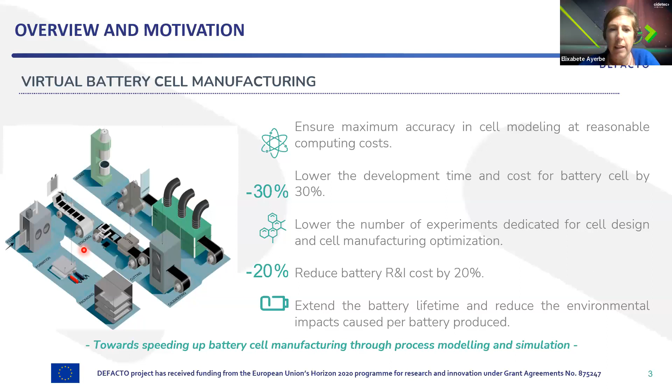So this is very much the core activities within the project, but we cannot forget about all the characterization and prototyping work, because without the real cell, we wouldn't be able to calibrate and validate the tools. So even though the main contribution is on the modeling, we cannot forget all these activities on the characterization and prototyping, as I was saying.

And then something in which we might be also working is to provide certain guidelines, or to see how we can transfer the knowledge and tools we have gained within the project to different chemistries like the LNMO and graphite silicon, as pointed out here.

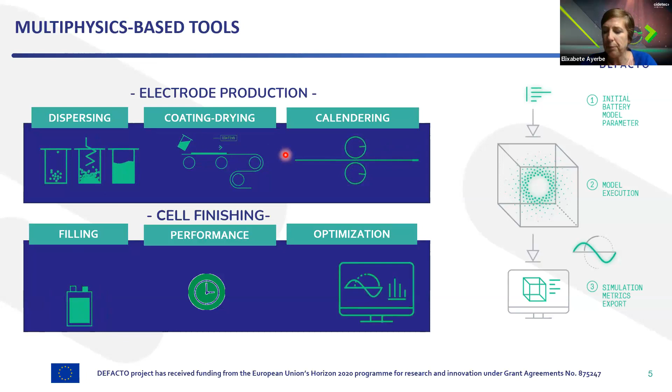So this is the main target, and this is a very complex procedure, but we are in good shape, and I would say on a good track to reaching the target. So coming to the physics-based tools, as I was saying, we are very much focused on electrode processing, but also on the filling step.

So our partners like TU Braunschweig have been leading these 3 step models in which they are working. They have already developed a tool so that they can mimic, or identify, the best agglomerate size depending on the shear stress in this dispersing or mixing step, the wet mixing procedure.

Then jumping to the drying step, they have developed a CFD-DEM simulation, and then they can predict certain properties of the electrode, like the thickness and porosity, depending on the drying parameters, which is a very complex step, so it might be impacting very much not only on the performance but also on the aging, depending on these specific parameters, as well as the active material distribution.

And then finally, they've been working on the calendering, developing DEM simulation tools in order to replicate the impact of certain calendering parameters like the compaction or pressure parameter onto the final density or mass loading of the electrode together with the final porosity.

So this is very much important, but not only this, because what we are doing currently is to connect this final electrode configuration to the filling procedure step in a way that they have already developed tools. They are different high fidelity tools so that they can identify the best filling process parameters to predict final performance, like pressure saturation, or how gas entrapment might impact and so on.

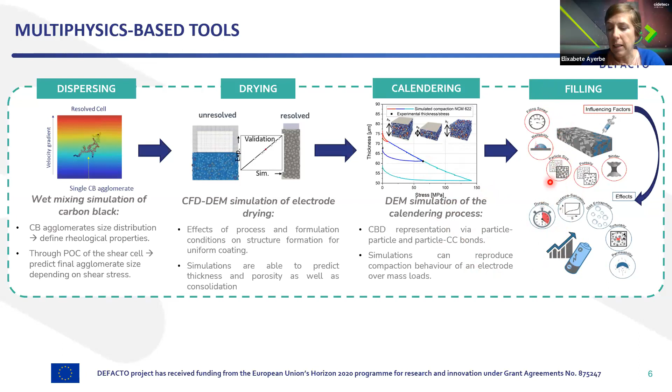And also here, it is related to the fidelity of the tools that they have currently developed, as I was saying, different fidelity tools in order to replicate this specific step in the filling, and by means of these tools, they are able to identify the best filling procedure steps.

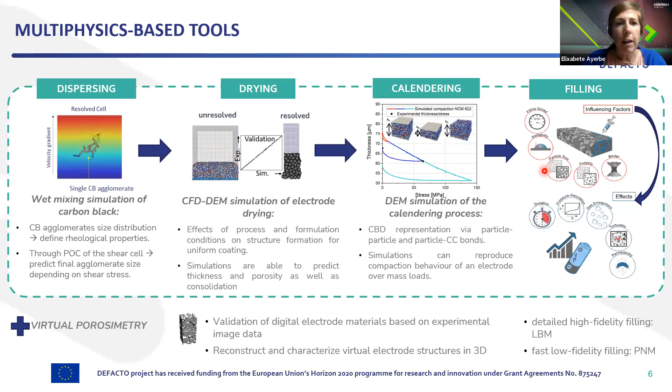So this is related to the manufacturing, while we are also connected to cell performance, and within DeFacto, we are also covering a multi-scale approach in cell performance and aging, and we are very much emphasizing the mechanics because one of the chemistries being analyzed includes silicon. So at the atomistic scale, what we are able to do right now is to predict mechanical and electrochemical parameters and the OCPs, and then this comes into the next step, in which they have macro scale simulation of the mechanical response, and they are able to track and link to the mechanical aging at these scales.

And then on the continuum scale, they are including these mechanics together with the electrochemistry, and then, maybe this way, you can see the swelling of the electrode depending on the parameters of the silicon that might come from the previous scale.

So this is on the continuum scale, in which these are the 3D domains, while coming to the continuum but simplified P4D approach, we have already developed efficient tools in which we are able to perform simulation of the aging of the cells. The partners involved, because I didn't say, are Fraunhofer, CEA, UPM, AB, and CIDETEC.

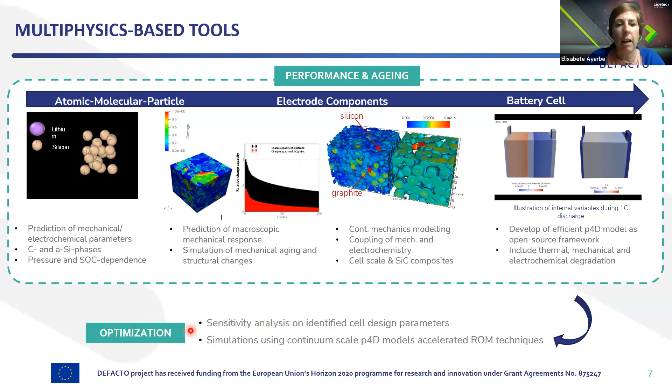And the idea behind is we want to identify the best electrode and cell design configurations and later link to the manufacturing. So obviously before the optimizations, we have already performed sensitivity analysis to identify if certain parameters are sensitive or not, and how they impact the cell performance, and then we are carrying out the optimization. And later, again, my colleagues from UPM will be describing the tools that have been already released as open source.

So one of the examples we are already working on is to identify this best configuration of the cell. In this case, we are including the specific case of a graphite NMC811 cell, and what we want to identify is the best electrode properties such as the porosity and thickness, and to obtain this, we have released one of these tools that will be described by UPM.

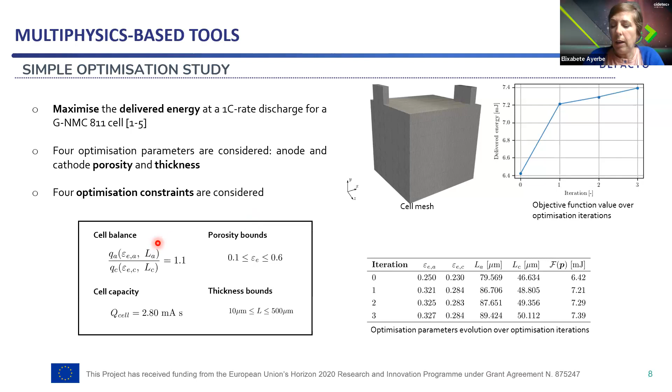So this is one of the examples, and the idea behind, as I was saying, is to link these properties to the manufacturing tools. So this is the complete workflow, and the idea is to link each of the individual tools which are developed within the project together with the specific cell chemistry and specific parameters.

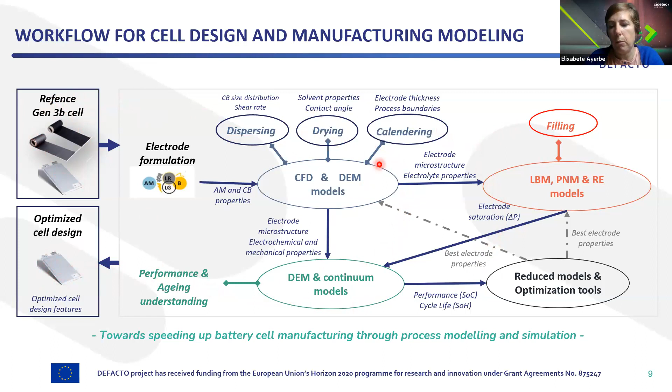So our main target, as I was saying at the beginning, is to provide guidance to cell design and cell manufacturing in order to accelerate the development phase. So we will start running with one sample of the cell, but once we develop everything and once we are focusing very much on the specific chemistry, the idea is to provide a new configuration of the cells by means of the modeling tools. So what we see is that there are like two directional work.

On one side, we can predict the impact of the manufacturing process onto the cell performance, and this is the straightforward output of the Defacto. But then also what we are very much interested in is providing guidance on how we can maximize energy density or maximize durability, and to identify which are the best parameters to manufacture it.

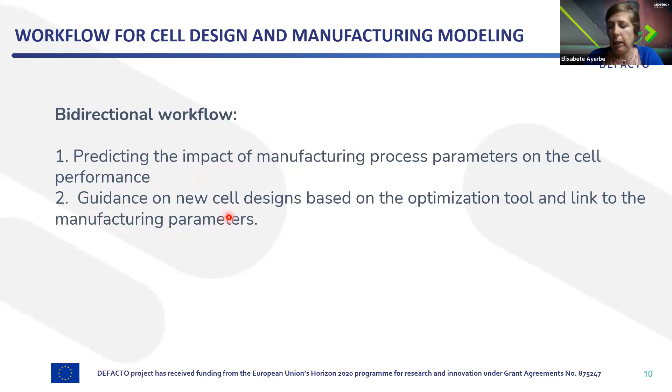So to obtain this, first of all, we need to calibrate the codes and we need to validate the codes. And for that, we need to have a huge amount of information on the experimental side. Within the project, we are working on characterization at different length scales, like the materials, electrodes, and cells. And this is an ongoing task, and obviously it's quite tedious because we are not only considering electrochemistry, but also mechanics. So there are a huge number of parameters to obtain within the different chemistry cells.

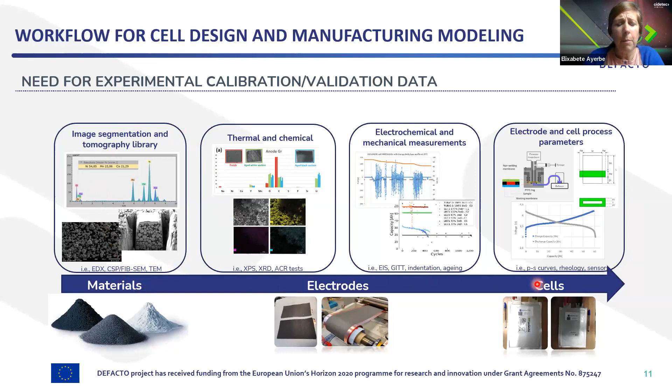And then obviously we need cells, and we have on board our partner Leclanché, who have already provided an industrial commercial cell, but they are also providing information on our prototype graphite silicon nickel-rich cells, on which we are running cycling tests, and then we will be doing the postmortem of the anodes to identify degradation mechanisms, and also to extract the parameters to fit the specific models capturing these specific degradation mechanisms.

Not only the commercial or industrial cells, but we have more prototype cells coming from TU Braunschweig and CIDETEC. We have already manufactured prototype graphite NMC622 cells. We are running cycling tests. We will be doing postmortem, and then extract all the parameters, which are a huge number of them, in order to calibrate the code and validate it. Then, finally, we will also be working on the prototype graphite silicon NMC811, and this is currently being assembled at CIDETEC.

So coming to the workflow, we will be focusing on this specific chemistry, mainly because we want to make a proof of concept of this workflow, and we need the data, and everything is prepared for this. The cells are assembled, we are running tests, we will soon do the postmortem, so we expect to have everything in place in order to start running the simulation with the weak coupling of the workflow. So the workflow will be based on this technology, but nevertheless can be transferable to other chemistries, obviously.

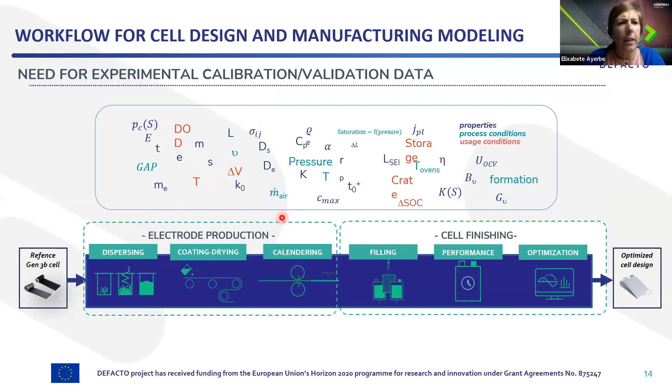So as I was saying, there is a huge number of parameters that we need to obtain in order to have each of the models calibrated and validated. But although it's tough and tedious work, it's already in place, and each of the partners has a huge contribution here. At this stage we have already all the models developed and implemented, and they have already validated the code with their own cells or cells that have been already developed in the Defacto. And now the main target is to transfer this validation to a specific chemistry cell that will be this graphite NMC622.

So basically, we are very much interested not only in the first point, that the first target of the workflow is this straightforward configuration, predicting performance depending on the process parameters, but we are very much interested in optimizing and providing guidance through an optimized electrode configuration, and translating this information to the manufacturing in order to identify the best process parameters.

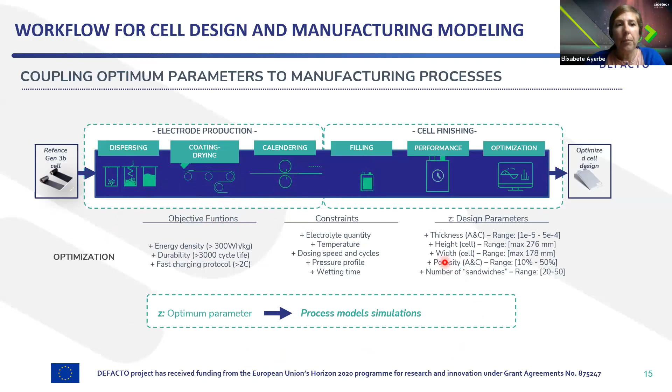So here, we need to run this optimization simulation, and it's really important to conduct it properly with efficient codes, and this will be explained by my colleagues from UPN later on. The main objectives of this optimization will be to give an answer to these three aspects, which are basically energy density, durability, and fast charging protocols. So what we want to solve is a multi-objective function in order to enhance cell performance and then try to correlate it with each of the individual model parameters. So yeah, this is the current state of the workflow. Just as a conclusion, each of the simulation tools is already in place.

It has been implemented and validated, and they are ready to start building this weak coupling of the workflow. And then also for the optimization tool, as you will be seeing later on, it has been already implemented and validated, in this case against literature data, and it's almost ready for being used in this workflow application.

So the main caveat we might have now is to validate each individual tool for a specific cell chemistry in order to build this proof of concept of accelerating the cell design and manufacturing process.

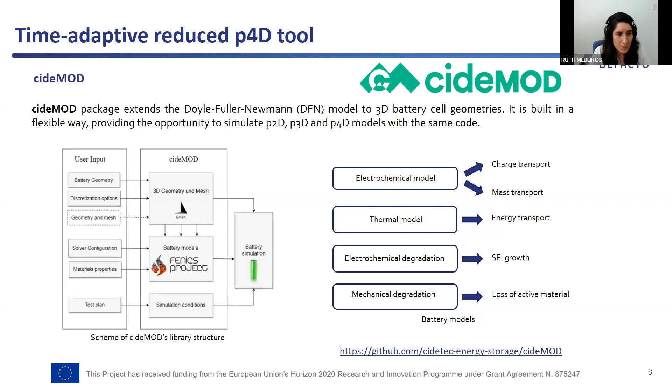The second element is echROM, which is an acceleration tool based on the use of time-adaptive model order reduction techniques to solve the P4D continuum models. The solution in this case is carried out combining the use of cideMOD for some short periods of time and the integration of the P4D model by a reduced order model built on the fly using echROM.

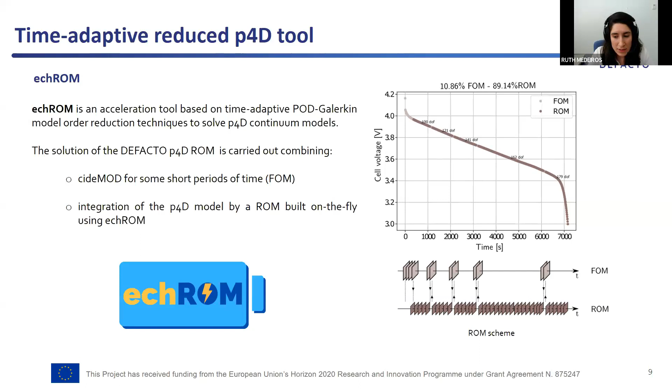In the schematic at the right of the slide, you can see how the simulation starts by solving a few time steps using the full order model. Then we switch to the reduced order model and integrate in time until the reduced order model solution loses its accuracy. We come back to the full order model to update the information needed to update again the reduced order model, and we continue integrating again and repeating the process until the final time or the cutoff voltage is reached.

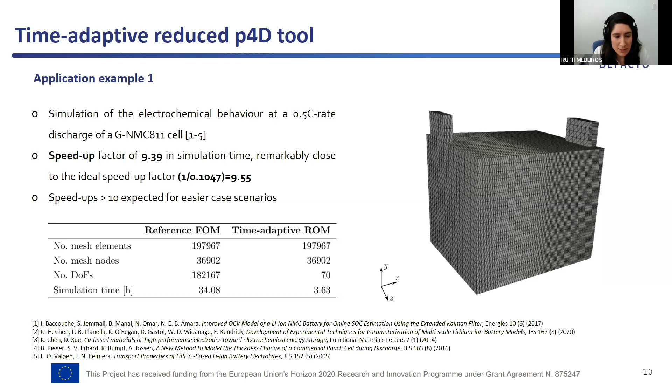In this case, the percentage of time steps solved using the full order model is around 10%. So the reduced order model gets a speed-up factor of almost 9 in simulation time when compared to the cideMOD simulation. But we expect a bigger speed-up factor when we consider easier scenarios.

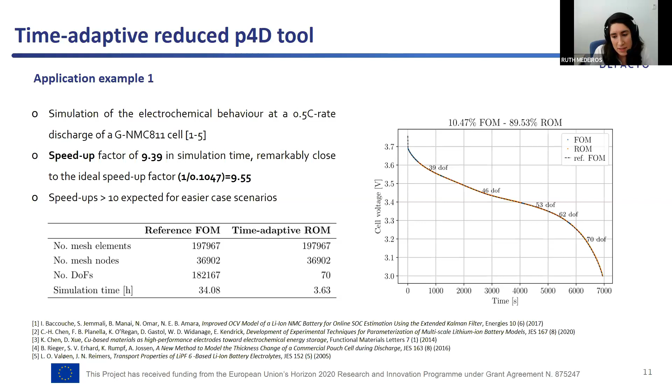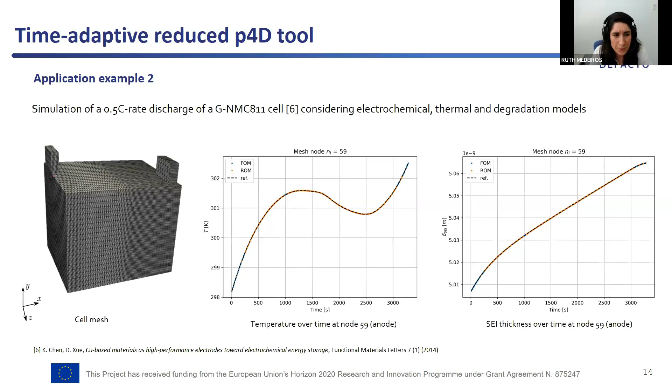Well, the second tool developed in DEFACTO is the optimization tool called Time and Parameter Adaptive Reduced Order Model, and it is internally organized in 3 different components: CIDEMOD, ECROM, and OptiBat. OptiBat is a Python package developed by UPM and CIDETEC to efficiently perform cell optimization using time and parameter adaptive reduced order models.

Well, OptiBat is a Python package developed to efficiently perform the cell optimization, and it combines the use of the time adaptive reduced order model together with a parameter adaptive strategy to accelerate the computation using information of previous reduced order models. OptiBat contains the implementation of an interface to the SciPy optimization algorithms. So as effective optimization algorithms use the gradient or the derivatives of the optimization functional, OptiBat provides the possibility to compute these sensitivities or derivatives to use the gradient-based SciPy optimization algorithms.

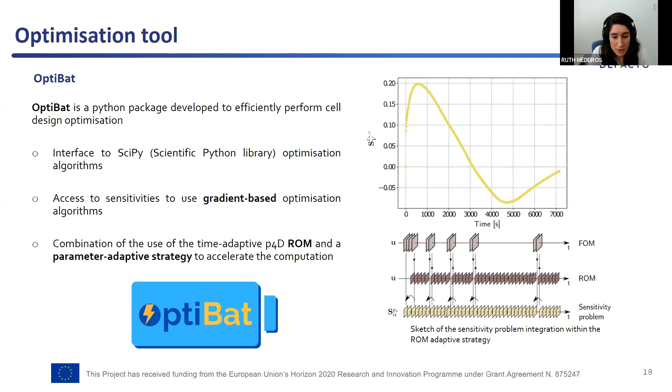Well, in the left part of the slide, you can see a schematic of the structure of the OptiBat package. It contains 4 different modules, but the most important of them is the opt module. It has some submodules such as the derivatives one, which contains functions that we use to compute the problem sensitivities. In the figure at the right part of the slide, you can see 4 different sensitivities of the problem variables corresponding to the 1C rate discharge for a graphite NMC cell. And as you can see, there is a good agreement between the reduced order model sensitivities and the reference sensitivities, which were computed using the full order model and the finite differences method.

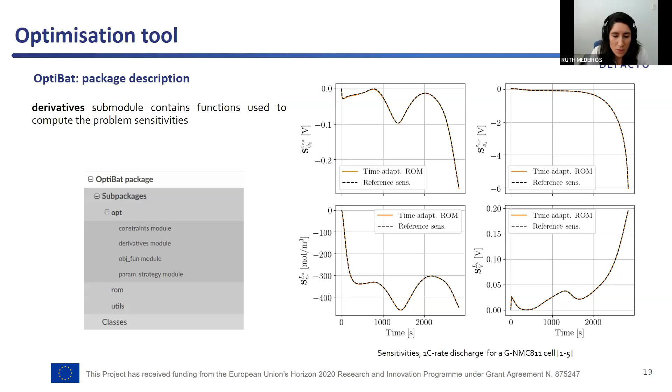The second submodule of this package is the param strategy, which implements the reduced order model parameter adaptive strategy, which aims to reduce the number of time steps solved by the full order model to accelerate the optimization process. And this strategy uses the information of previous reduced order models to enrich the current reduced order model and reduce the number of necessary adaptations.

So in the figure at the right, a comparison between 2 optimization strategies using different reduced order models is shown. In the left column, you can see the voltage over time at each optimization iteration for a time adaptive reduced order model, corresponding to the maximization of the delivered energy of a graphite NMC cell during a 1C rate discharge.

And in the right column, you can see the same result corresponding to the use of a time and parameter adaptive reduced order model. Here in each figure, the shaded areas correspond to the time steps solved using the full order model.

As can be seen, the second strategy, the one to use a parameter adaptive technique, can significantly reduce the number of time steps solved by the full order model and reduce the number of required adaptation for the reduced order model.

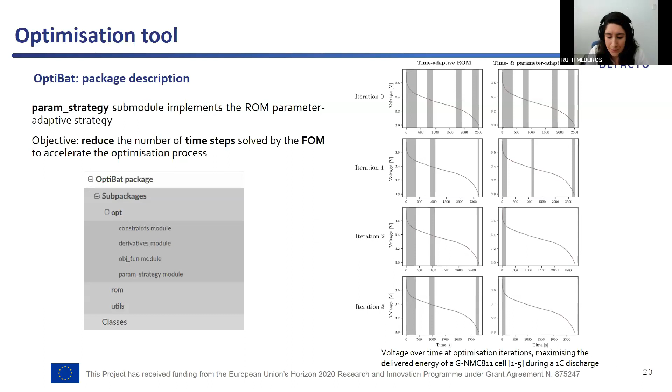To analyze the performance of the parameter adaptive strategy within the optimization, we will see the result corresponding to the maximization of the delivered energy at a 1C rate discharge for a graphite NMC cell, considering in this case 4 optimization parameters: the anode and cathode porosity and thicknesses.

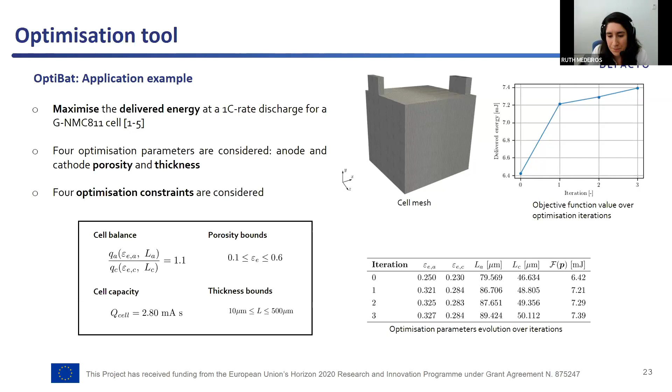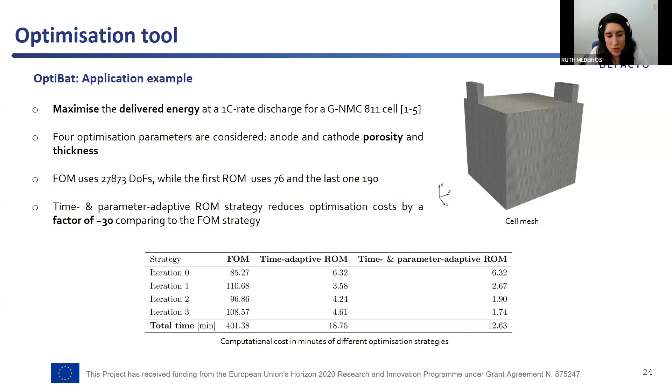Able to reduce the computational cost by a factor of 20. This factor can be increased to 30 when we add the combination of the time and parameter adaptive reduced order model. So as you can see in the table, the full optimization cost using both reduced order models takes lower time than the evaluation of the first iteration with the full order model strategy.

To conclude, within the framework of the Defacto project, 2 efficient tools have been developed. The first one is the time adaptive reduced P4D, which achieves a speed up factor of 10 when compared to the simulation using the full order model.

So to conclude, I'd just like to indicate that these two tools are in continuous development within the Defacto project, and that we are currently working on extending the capabilities of the optimization function to solve global and multi-objective optimization problems. So that's all from my side, and thank you very much for your attention.

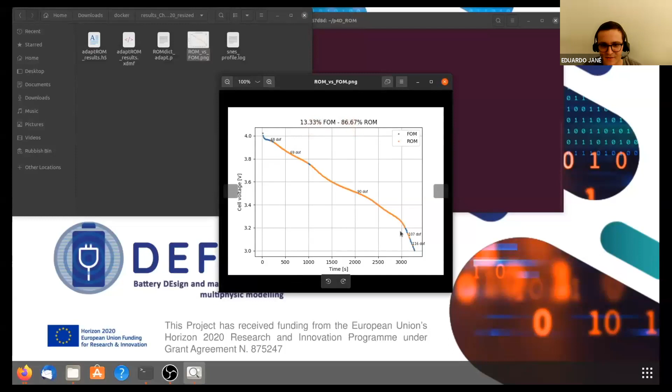The first thing that we're going to see is this image file created by default, which shows the cell voltage curve and some details of which fractions of the simulation have been run by the full and reduced order models.

There's also a second default .p file that has been generated, which can be opened in Python. We're opening a Python console and need to import the pickle package or module. Now we can open this .p file as a binary file with Python and use pickle to load it into a dictionary type variable, like we're seeing on the video.

After this is done, we can inspect the keys of this dictionary containing all the results of the simulation, and we'll start looking into the mesh field. The mesh field basically contains all the information necessary to reconstruct a mesh, such as the position of all the degrees of freedom, the degrees of freedom contained in each subdomain, interface, and so on. We're not going to look into it in too much detail, but all the information required is there. There's also all the variable distributions across the degrees of freedom of the mesh and time stored in this file.

Now we're going to exit and proceed to open a 3D post-processing tool. We've chosen ParaView for this tutorial, since it's possibly one of the most well-known free open source 3D post-processing and visualization apps out there.

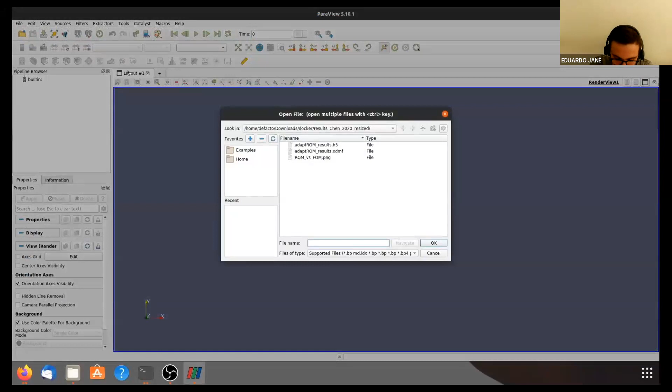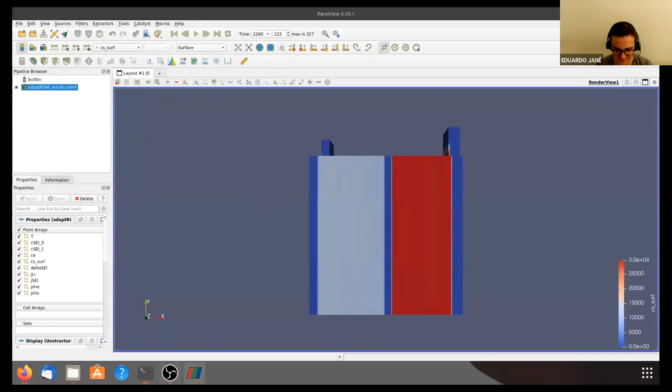Once we're in ParaView, we can load the generated XDMF results file into the application. Now we're able to visualize the distributions in space and time, amongst many other operations, of all the variables that the problem has been solving. Now we're seeing the concentration at the surface of the active particles, and if we hit the play button, we can see the evolution in time of this variable. This is just an example of what we could do when post-processing our results with a 3D visualization program.

Now we move on to the download and setup of the optimization tool, by entering the corresponding software page in the Defacto project website and clicking the download button, much like we did before. This page also contains a brief description of this tool, as well as links to additional resources, analogous to those we saw earlier: the installation guide, code documentation in HTML format, and a guided tutorial for an optimization example.

After the image is downloaded, again like we did before, we can open a terminal in our system and load this image file into our Docker daemon. In this case, it will take a little longer than the previous example. Once the image is loaded, we can check that it shows in the list of available images.

Now we proceed to the creation of a new container for this optimization tool, running the same command line we used before, but now giving a new name to our new container, linking again the shared folder in our local system to the one inside the container, and finally specifying the name of the image from which the container is going to be created. After executing this command line, a console will start running on the newly created container, and we can proceed to a quick file structure walkthrough.